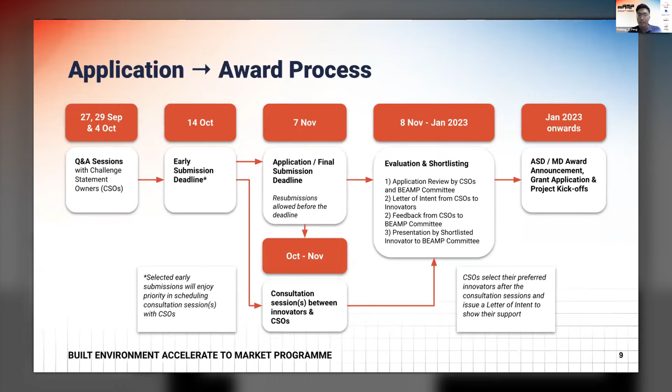There are two development tracks for the BEAMP program: the Accelerate Solution Development track and the Market Development track. Let me explain both tracks so you understand which one to apply for.

If your company has discovered the challenge statement and is in the early stages of developing a solution that could potentially address any of our challenge statements, you should apply for the Accelerate Solution Development track, or ASD for short. The scope of development for the ASD track should be planned to be completed within 3 to 6 months.

Examples of activities that could be carried out during ASD include user studies, tests to ensure usability of the solution, developing prototypes or running simulations to demonstrate technical feasibility and accuracy, aligning the solution blueprint and pilot implementation plan with stakeholders, or conducting cost-benefit analysis to ensure viability of the solution.

BEAMP will help subsidize your development costs. Funding support for the ASD track is capped at 30,000 Singapore dollars or 70% of the qualifying costs.

If your company has already developed a prototype or early product and you have identified further developments needed to ready your solution for adoption and commercialization, you should apply for the Market Development track, or MD for short. The scope of development for the MD track should be planned to be completed within 12 months and should result in a complete solution that can be commercialized.

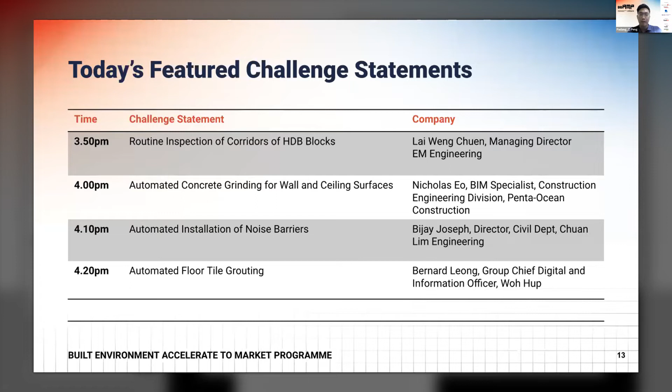To start off the presentations, we have Dr. Lai Weng Chuen from EM Services, who will be presenting on the routine inspection of corridors of HDB blocks. Dr. Lai, over to you. Thank you for the time, and good afternoon to everybody.

Just to give a brief background of who we are, EM Services is basically a managing agent of town councils. There are currently 17 town councils in Singapore, and we manage 10 out of the 17. Some other numbers you may want to know: there are about 10,000 blocks of HDB flats, and the total number of households is about 1 million. So we manage about 2/3 of them.

So in our day-to-day management of the estate, we will share today one of the challenge statements of what we do, and hopefully the audience out there could provide us with some solutions.

One of the things that we do is a corridor inspection. So some statistics in terms of the number of blocks out there: each town council has about 600 blocks. It could be more than 600, it could be less - about average 600 blocks.

One of the tasks that our property office does is corridor inspection. There are common areas in front of the flats, and we look for hazards and any defects or obstructions. This is done once a month, could be done more if there are more problems with that area. The buildings range from 2-story to 50-story - for example, Pinnacle is 50-story.

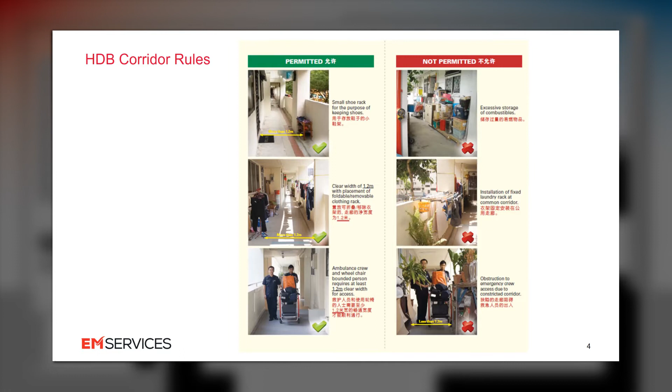So what do we look for? This graphic shows some of the things that are allowed and not allowed in the corridor - obstructions that would hamper the movement of people, especially during emergency. It's critical that there is enough clearance space for rescue people or SCDF to move, so typically we need a space of 1.2 meters. That's a requirement for clearance in front of each unit. Other things we inspect, for example on the wall, any cracks, bulging plaster, spalling concrete - we look at that, and all this is done visually.

On the corridor parapet, any corroded or missing railing, anything hazardous placed there that may fall off and become a killer. The lighting as well - any flickering or dislodged light fittings. The lighting checks are mainly done at night, not during the day - and any fire hazards left along the corridor, for example abandoned damp cardboard boxes, or sometimes gas cylinders, which are definitely hazards.

Then the scupper drain - the drain for rainwater just below the parapet - shouldn't be blocked, and there shouldn't be any water ponding, so mosquitoes don't breed there. As mentioned, we need about 1.2 meter clear passageway for movement of people and trolleys. Cleanliness as well - any spider webs, bird's nests, or even hornet's nests can appear on the corridor.

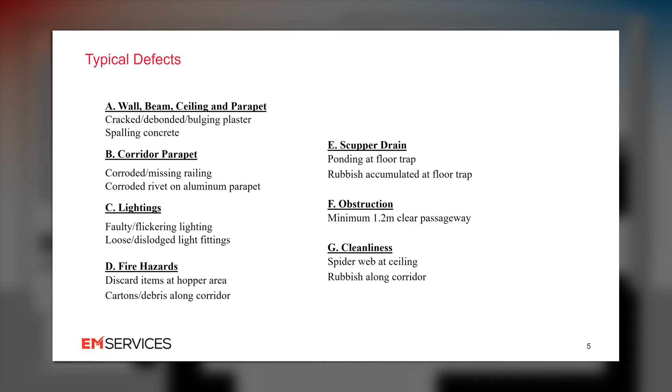These are typical things our property officers inspect on each and every floor. This is very manual, so we're looking for automated solutions, probably with video and video analytics, and some automation like robotics, where the robot can travel from floor to floor - which means the robot needs to be able to take lifts.

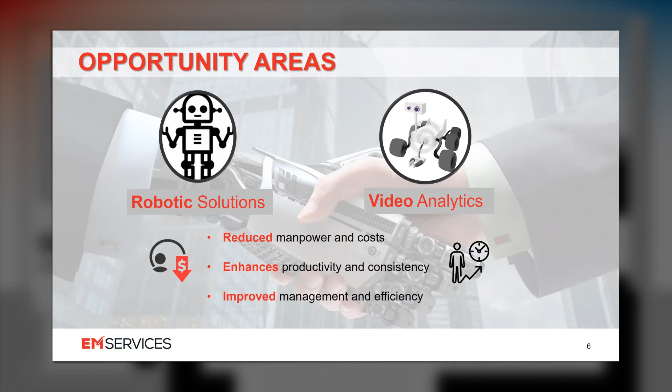In most blocks there will be at least one lift, most have 2 lifts or more. So the robot needs to be able to interface with a lift, take lifts from floor to floor, and do the necessary inspections. Given the number of blocks we cover, I think we need some product improvement, which I'll touch on later.

These are some of the challenges we see. Navigation - the robot cannot be too big, given 1.2 meters of corridor space in which it needs to move or even turn. Within the lift itself, the door opening is about 900 mm, so the robot needs to be able to go inside the lift and reverse out or turn inside the lift as well. That's the space limitation that's allowed.

The robot has to operate autonomously, and sometimes there needs to be human intervention - especially when the robot hits a situation with some conflict where it's unable to continue autonomously, then you may need remote piloting. Somebody from a command center can see all the video streams coming back and manually pilot the robot out of the difficult situation.

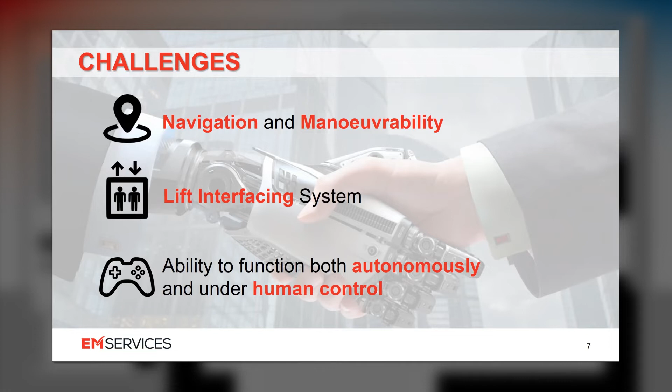Some other requirements given these conditions: human avoidance, noise generation - because these are along the corridor and we intend to do the inspection at night, when there's little people movement, especially in the middle of the night, that's what we're targeting. If we deploy the robot at night, it should not generate too much noise. Then it should be able to navigate from block to block.

As mentioned, between the hours of 11 to 4 a.m. there's a time the robot can go and inspect the blocks. So we expect that during that time the robot should be able to inspect more than one block, hence the requirement that it's able to navigate from block to block.

Insulation is more of an issue if we deploy at night, it's more of rain; heat if we deploy during the day. Rain may fall, especially between blocks, where there may not be any protection, so the robot needs to have some IP protection.

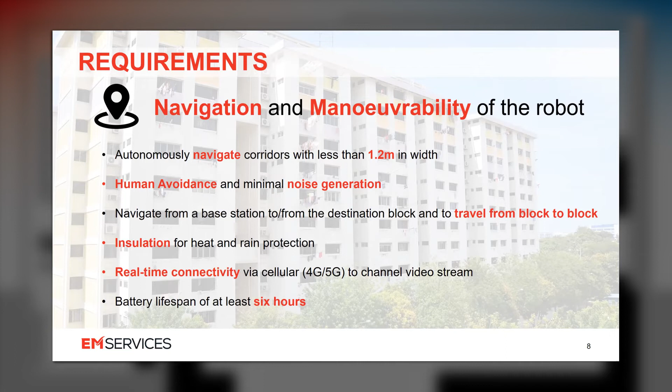We mentioned connectivity to the command center, whether 4G or 5G, is so-called accepted, because we need to do remote piloting. And battery lifespan of about 6 hours, that's because between 11 and 4 or 5, we need that kind of battery life.

So lift interfacing - again, no human intervention. The robot should be able to take the lift, and there are various lift brands out there. This lift could be as old as 20 years and as new as less than a year, so the robot should be able to interface with these different brands of lift. For reference, there's a technical reference, TR93, which will give you information on how to interface the robot with lifts.

This may not be the only way to interface, so you are free to propose other interfacing methods, or even some attachment to lift control panels as well. But bear in mind that whatever you add on or wherever you interface, you have to interface with different brands of lift.

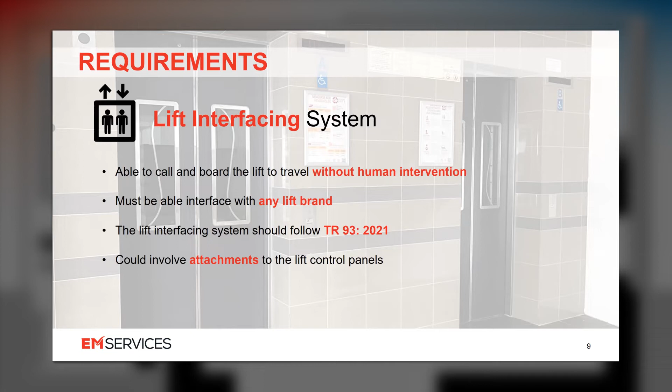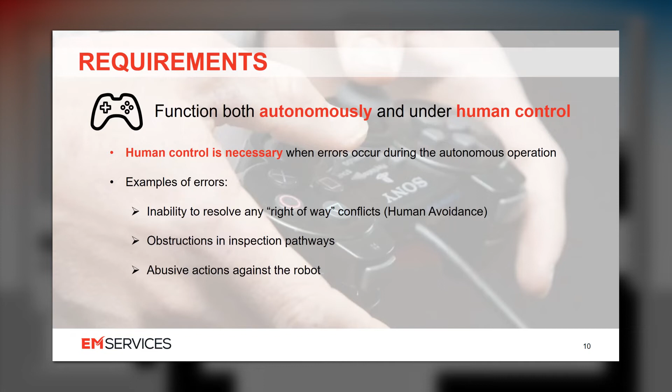So human control, as mentioned, is that in case of conflict, in case the robot is unable to resolve any navigation issues, then the human command center should be able to take over and remotely pilot the robot. Okay, I think that was my last slide, so I'm open to questions and answers.

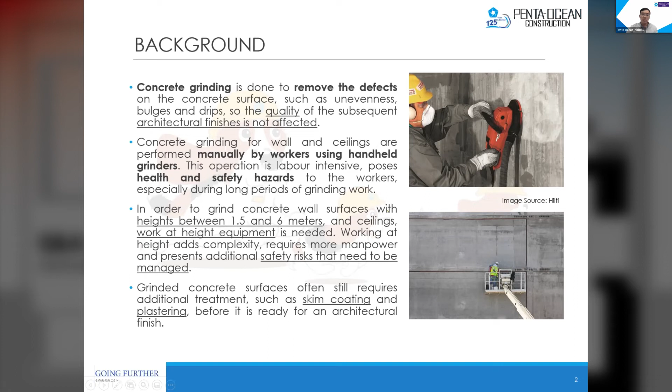After concrete surfaces have been grinded, they often still require additional treatment, such as skim coating and plastering, before the concrete surface is ready for architectural finishes.

As a guide for current practice, we look at the concrete surface profiles, in short CSP. It gives concrete surface treatments 10 different classifications, named from CSP1 to CSP10, with CSP1 being the finest and smoothest surface, and CSP10 having the roughest and most uneven surface.

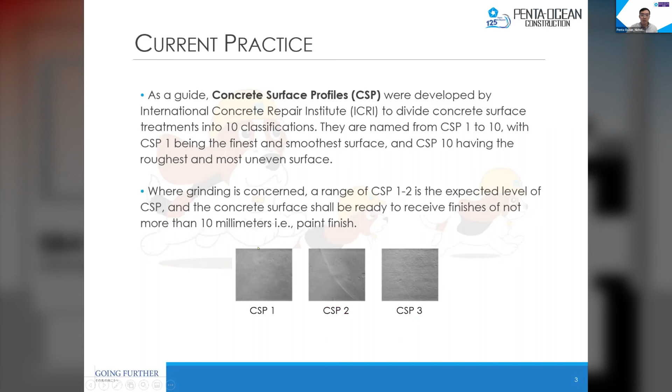Where concrete grinding is concerned, a range of CSP1 to 2 is the expected level of surface treatment. The concrete surface at CSP1 to 2 will be ready to receive finishes of not more than 10 millimeters, such as paint finishes. These two images show what CSP1 and 2 look like.

For opportunities, what Penta Ocean is interested in are robotic solutions. They are able to partially automate concrete grinding works as a start, and then can later be developed into a fully automated solution.

For example, in the early development stages, a worker can deploy the solution to do concrete grinding for a chosen section of wall or ceiling, and then go on to do other activities. After the work for the section is completed, the worker can return to turn on the machine for the next section. This frees up workers to perform other activities while also eliminating the safety risks associated with grinding, because there's less need for physical monitoring of the work done.

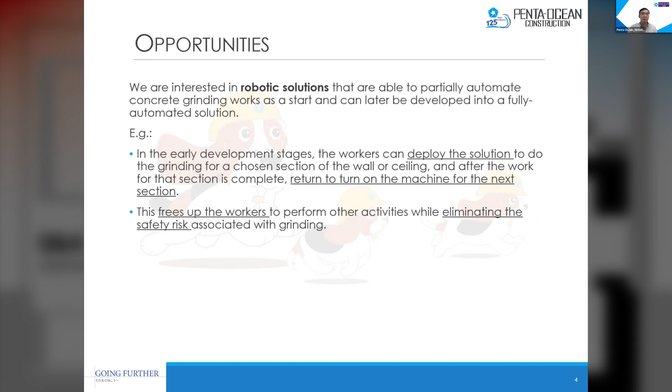For requirements, this list needs to be fulfilled for the solution to be considered successful - basic criteria that would make the solution feasible to use in construction work. Firstly, it should accurately grind all assigned surfaces to a consistent surface quality. Secondly, it needs to accurately identify the quality and defects on concrete surfaces and adapt to grinding.

Thirdly, it needs to minimally perform concrete surface grinding at 7.5 meters squared per hour, and it needs to grind surfaces of up to 3 meters in working height.

It should also allow for interchangeable parts for different grinding discs and different grinding activities, and the resulting quality of work should follow the standards of CSP 1 and 2, and also comply with BCA CONQUAS 2019 standards. It should also perform in full consideration for safety on site, health, and environment.

It needs to support data collection on work done for progress checking and inspection purposes. It should be able to operate on site through on-site power generators, especially in construction sites. And last but not least, it needs to be able to fit in vertical transportation and work-at-height equipment.

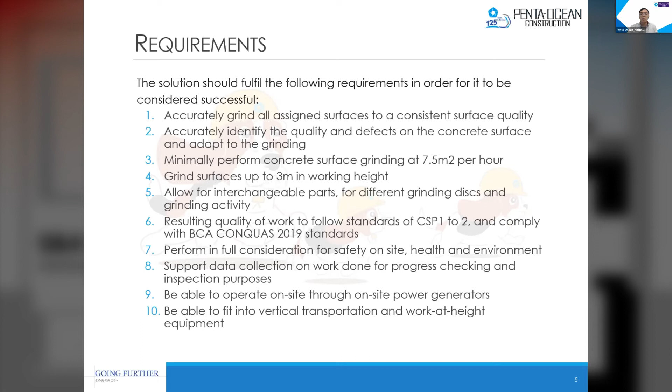We would also like some more add-on performances for the solution, which would be desirable. It would be desirable if the solution is able to be designed to access heights of up to 6 meters or more when integrating with common work-at-height equipment.

Secondly, if we can improve the quality of works to reduce or eliminate surface treatment works such as skim coating and plastering, it will help us reduce the need for preparation for paint finishes and other architectural finishes. Then, the solution should be able to traverse and park on uneven slope or stepped areas.

Lastly, it's desirable that the solution consider how grinding can be done for joint areas, such as vertical or horizontal elements like slab soffits or interfaces between wall and floor joints, and also joint areas between adjoining elements, such as wall-to-wall and slab-to-slab interfaces.

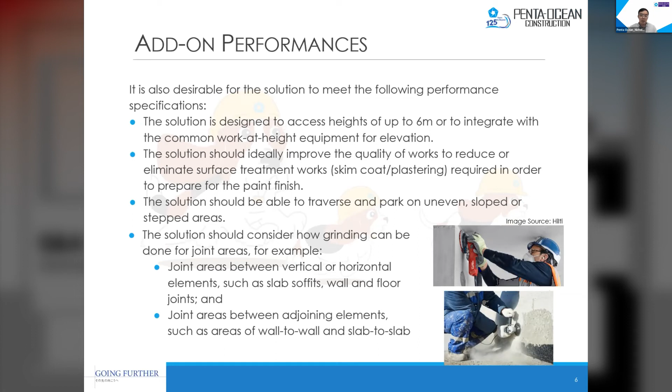For outcomes, ideally we want a solution that can provide autonomous concrete grinding, meaning it completes the work without human intervention except for deployment, redeployment, and termination, doing so accurately and quickly over 7.5 square meters an hour. Ultimately, the solution will reduce or eliminate the need for manpower, allow for remote execution, and reduce the total cost and time needed to prepare a concrete surface for receiving architectural finishes.

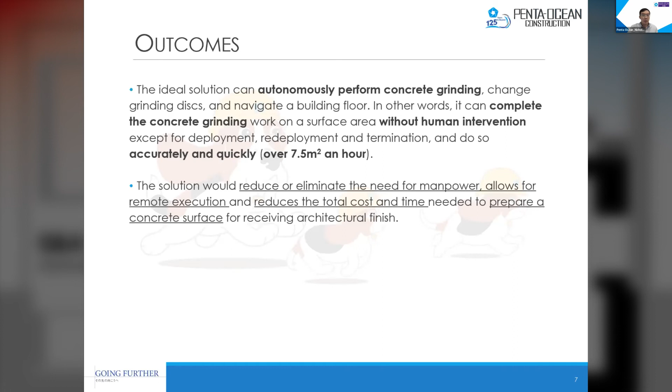Okay, I believe that will be the end of my presentation. So now if there are any questions, they can be taken.

Nicholas, would you be able to share more information regarding the projects you wish to deploy this solution at? For this challenge statement, we intend to apply it to one of our ongoing MRT transportation projects. We want to use this solution to grind a lot of our walls to make sure we can apply a paint finish directly onto concrete surfaces. To do so without defects, we need to make sure the concrete surfaces are smooth and don't cause any future problems with defects.

Thank you, Nicholas. Another question: in your slides you mentioned full consideration of safety, health, and environment. What are the things that are important to consider? For example, dust accumulation?

Yes, dust accumulation is of course one of them. Because dust accumulation could lead to not just health problems, but also fire hazard issues.

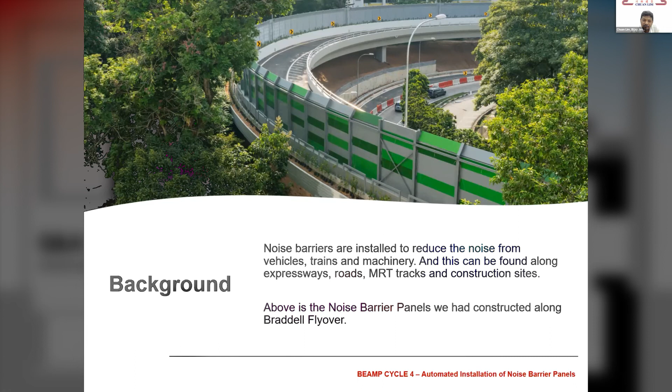Chuan Lim currently is involved in two noise barrier projects along the viaducts. You can actually see these noise barriers along the roads and MRT tracks. These noise barriers typically come with an operation which is pretty repetitive, and that will be explained in the next slide.

What you see here is two columns with the barriers installed in between. The operation we are trying to automate is the installation of the panels itself. Once the columns, the vertical members and horizontal members are installed, the noise barrier panels need to be slotted in from top to bottom, which you can see on the right-hand side.

This operation at the moment involves about 4 workers plus a lifting team. In terms of operation, it's a very repetitive process. Panels need to be lifted up, slotted into the vertical columns, and slid down all the way to the bottom. For the current panel we are doing, we have to do about 9 panels, multiplied by about 2 kilometers. We have something like 13,000 panels to be installed over a period of time.

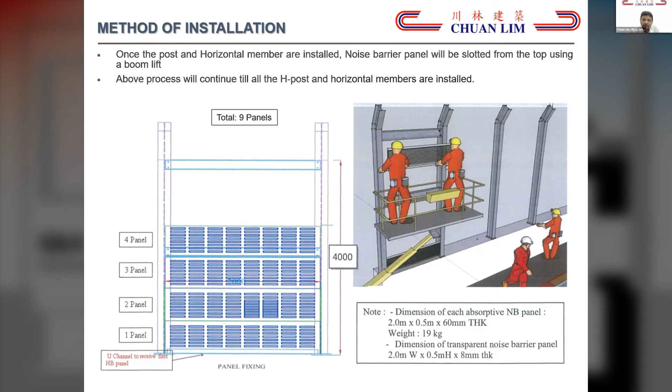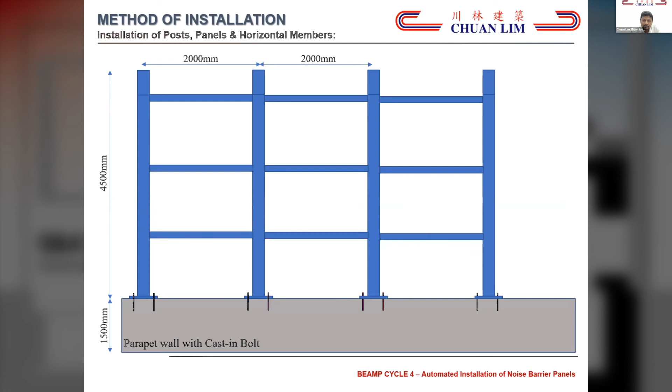So this being a very repetitive process, we thought there is a potential of automating the whole process. This is a visual representation of how the work is done, and this process keeps repeating itself.

What we consider as an opportunity to automate is a robotic solution that can actually install the noise barrier panels. In terms of operations, the solution must be able to transport the panels to the point of installation in a manner that does not cause damage to the panel or distort their shape. It has to be lifted off the ground, brought to the point of installation at the top of the column, and then just needs to be slid down.

So it must consider how the panels are collected. It must have a place for storage of the panels. It must look at the accuracy of the column structure and basically just slide it down all the way.

Currently we are taking about 10 to 15 minutes per operation for each structure, so we are also assuming the robotic solution would typically take around the same time. The solution should ideally be able to automate moving to the next column once one column is complete, and it should be designed to access a height of at least 5 meters. What we are doing currently is about 5 to 6 meters, and some work sites have heights almost up to 12 meters.

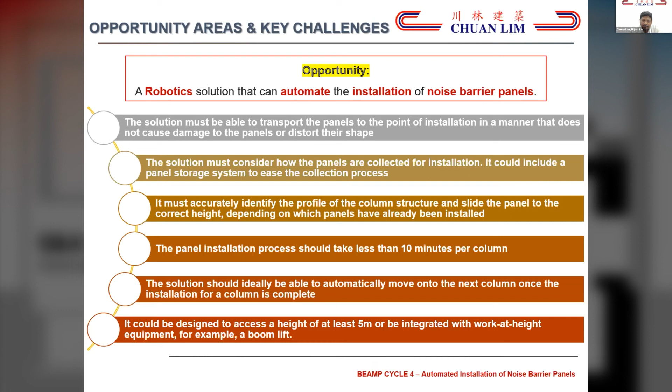These are slides which show how it is done and what the final finished product looks like. The robotic solution should collect and install the noise barrier within 10 minutes, reducing the machinery and manpower involved in the whole process.

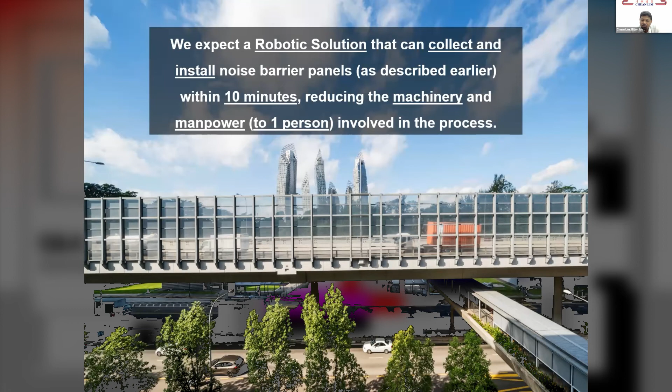That's a very quick presentation of what we expect the solution to do. I'm ready to pick up questions right now.

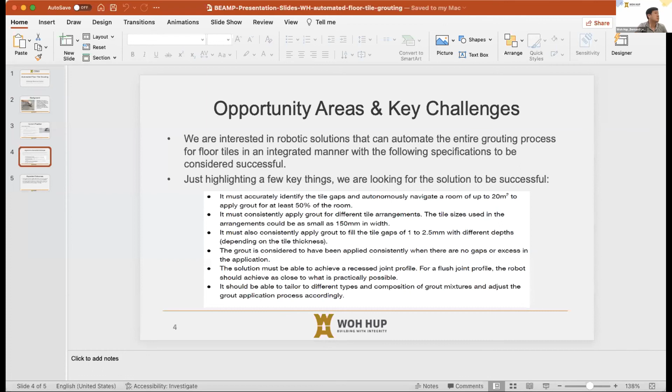Okay. Can you see the presentation now? Yes. Okay. All right, wait now, okay.

To first start off, just to give a quick introduction on Woh Hup, we are a main contractor in the built environment, and we also do civil projects. Our most well-known projects are the Jewel at Changi, Gardens by the Bay, the Interlace, and the upcoming Punggol Digital District.

Now, to come to the project itself. Just to give a little bit of background, grouting is actually the process of filling the gaps in between tiles.

Typically, you have either ceramic, marble, granite, etc. for the final finishes of floor and wall. It's a pretty labor intensive and repetitive process that demands time and skill to achieve the desired finish quality. And the main contractor is under what we call QM works, or quality management works as such.

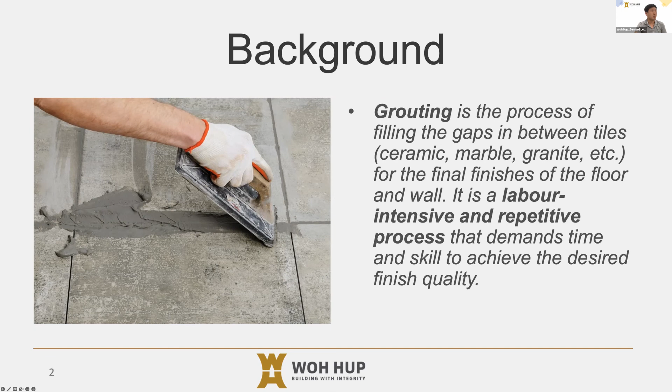In the whole grouting process, there are actually 5 major steps. First is the mixing of the grout material as per manufacturer recommendation. Then you have preparation and cleaning of the area itself. You also need to remove dirt and unwanted substances from the gap between tiles, and then you apply the grout in the gaps between tiles.

The grout is then packed into the gap using a plastic card or rubber pad, using this kind of motion. After that is the removal of excess grout and cleaning on the surface itself. Typically, just to give some context, it requires 2 man-days of work for one finished unit. So if you think of a block of condominiums, you will know how many units you actually require to do that.

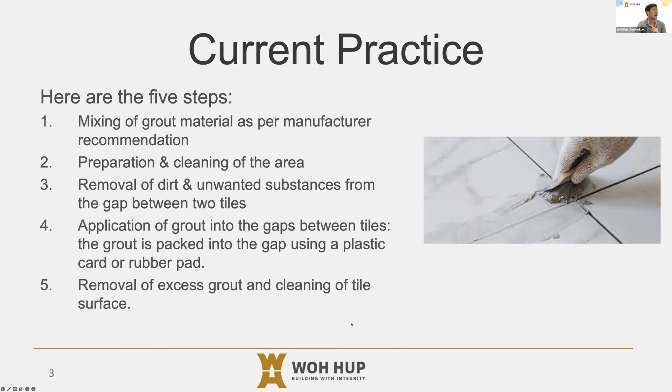Now I want to come to the opportunity areas and key challenges. We are interested in robotic solutions that can automate the entire grouting process for floor tiles in an integrated manner. For a start, we want to prioritize automation of the steps in the grouting process that have the most potential to generate productivity gain and improvements to quality. What do I mean by that?

What I mean is, usually in the whole grouting process, there's actually edges and also wall groutings as well. For the benefit of everyone, we don't want to do that first. We want to get the flat floor grouting done.

So what we want is to highlight a few things that would make this project successful. First, it must accurately identify the tile gaps and autonomously navigate a room up to 20 meters squared to apply the grout for at least 50% of the room. That's number 1. Number 2, consistently apply the grout for different tile arrangements.

The tile size used could be as small as 150 mm in width. You must consistently apply grout to fill gaps of 1 to 2.5 mm with different depths. The grout is considered to have been applied consistently such that there's no gaps or excess in the application. The solution must be able to achieve what is called a recessed joint profile. For a flush joint profile, the robot should be able to achieve as close to what is practically possible, and also tailor to different types of grout mixture composition and adjust the grout application process accordingly.

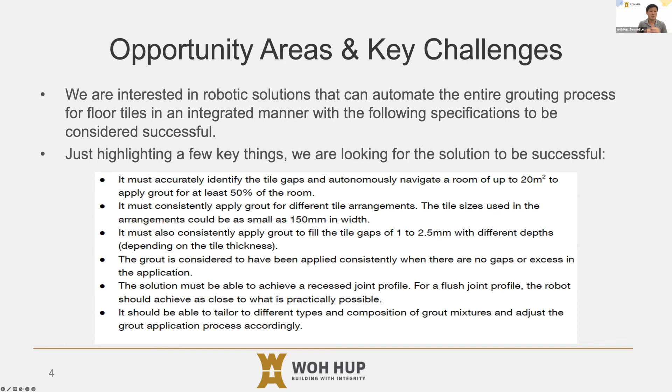Just to be quite upfront, this robotic solution we're looking for could take innovative approaches to conduct different steps in the grouting process instead of a step-by-step procedure done by human workers. It should also reduce the time taken to complete the grouting process or even reduce material wastage, because pre-mixed grout typically is discarded once it hardens. So the following solutions are also desirable as well.

Now, the expected outcomes: what we want to really focus on is a robotic solution that can apply grout for a room or area up to 20 meters squared for the floor tiles, which reduces the manpower needed to perform this grouting while improving the quality of work. This solution should help reduce the duration taken to complete the grouting of one unit by 50%, from 2 to 3 man-days down to 1 man-day.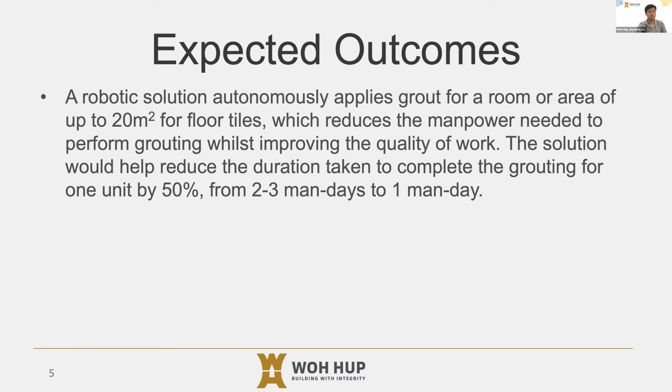So just starting with a question of my own. We discussed a lot regarding the robotic solution in the challenge statement. So perhaps to talk about the digital interface for the solution, what are the features that might be most useful for your workers, engineer, or management?

I think it's the ability to actually do that grouting process of applying the grout to the empty lines, and actually achieve a full grout, at least for most of the floor area, without touching the edges yet and the walls. Because grouting of those walls at the moment requires some reconfiguration of the robotic tool. You may want to design something that is extensible, meaning maybe a change of components to allow doing walls and maybe doing the edges. But I think if you could really get the flat floor up to the accuracy that we want for a grout, you could really solve a pretty major part of the problem.

Another key consideration is making sure that the robots can be deployed. One of the key things about productivity is that you could actually deploy multiple of such robots inside all the units, maybe within a night, and it could also be easily used by the workers, because I think we still need them there to help supervise the robot. The robot could be an automated robot doing something very similar to a Roomba, but we still need the humans to actually do that.